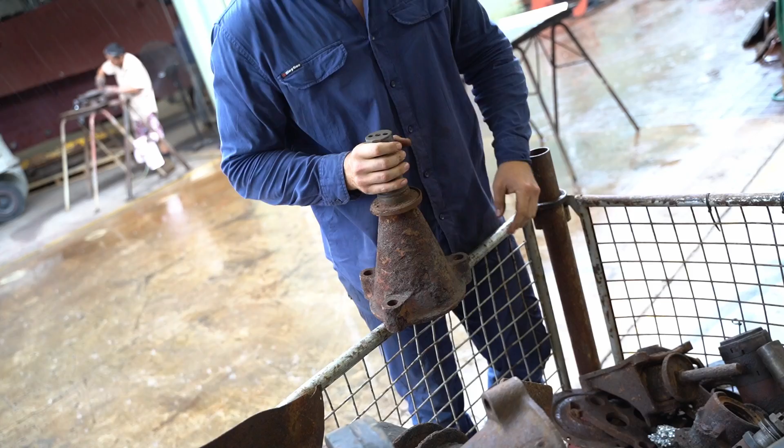The StuG pile in the museum is getting smaller and smaller. We've even brought out old part boxes from other StuG restorations in the hope that we might find parts we don't have. Even though this return roller looks usable, it's an early war one and not accurate for the variant of StuG we're rebuilding. These are the return roller wheels of the StuG III.

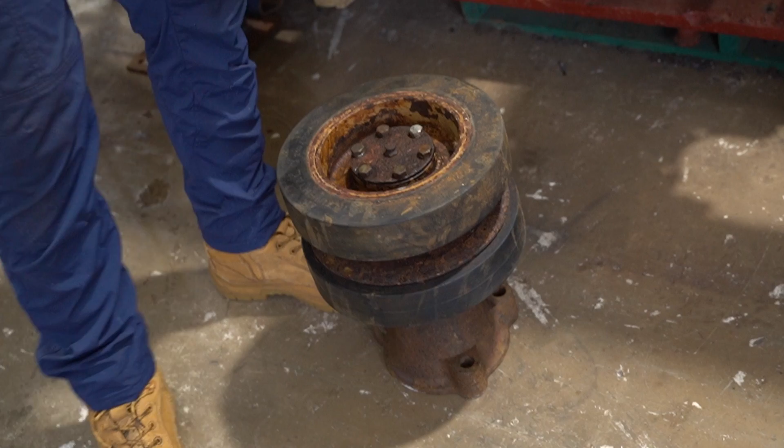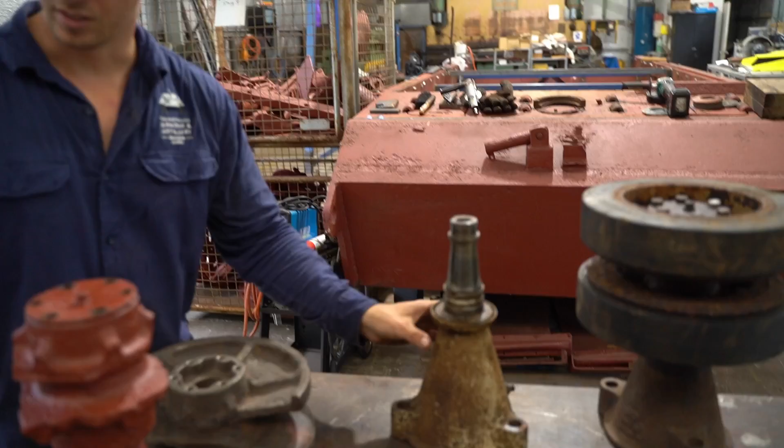We've got a few different types here. We've got one with rubber wheels, and we've got this one with the solid wheels, and a few differences in them. This is the early one here. Okay. You can pretty much tell straight away because of the design of it. Everything looks a lot more complicated than would have been late war. Yep. So this is a late one.

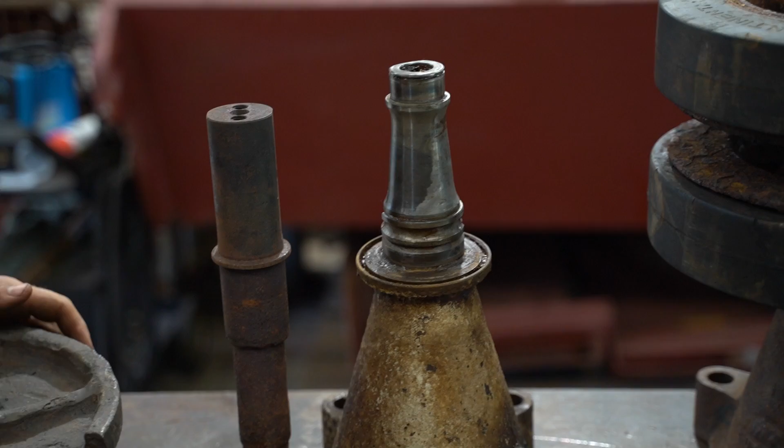As you can see, there's no taper or anything on the shaft. It's just straight. Does the exact same thing. It's a lot simpler to manufacture, a lot easier to make. This is the late one. This is actually what came off this tank. So this would have been 1945 made.

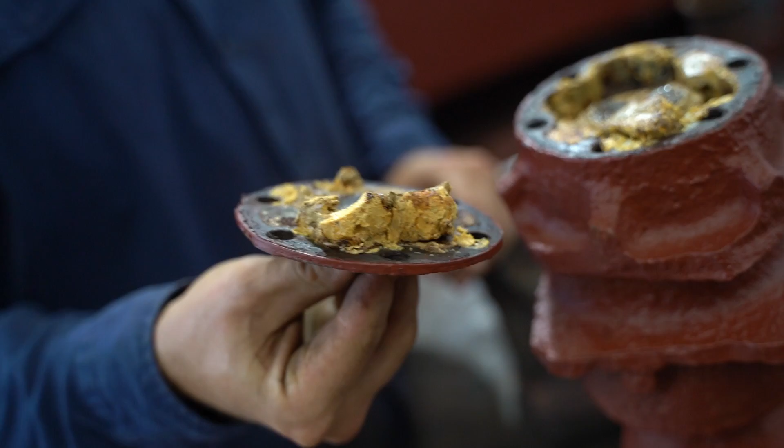So this wheel, everywhere I can see, it says that this wheel is supposed to be made by a different factory. I think it's called MIAG, not sure how to pronounce it exactly, and Alkett. This is what was on our tank when we received it. And we know that our hull is actually Alkett made, because Alkett would have been similar design, but with holes in them. 5 or 6 holes, I think it had. And yeah, these are the solid type.

So to sum up, our StuG is an Alkett factory StuG, but came out of the factory with MIAG return rollers. And it gets even more curious, as Beau made an interesting discovery. That's old grease, so the oil separated from it and that's what's left over. So that's what this piece here is, right? You can see your two threaded parts on the outside there. That's what these are, so they're bolts. And they hold the cap on. That cap sits against the inner of the bearing, and that's what...

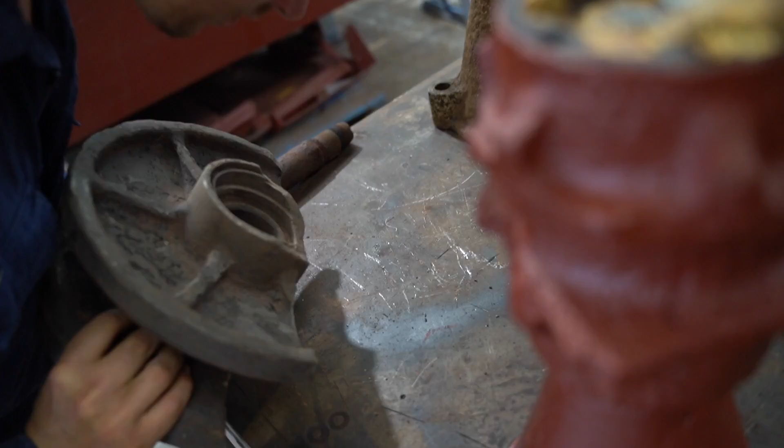No, I lied. There is no bearing. So the early ones had bearings, and the late ones didn't. So that would have just ran on that shaft purely. So the wheels, it's metal on metal. There's no spinning, moving bearing or anything. It's a late war thing.

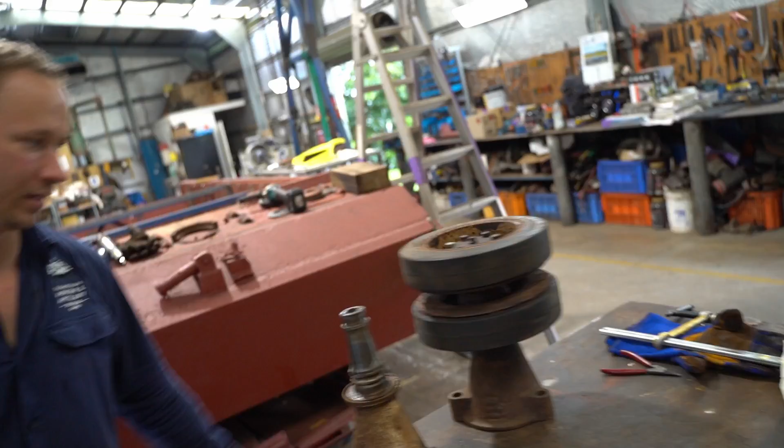So ball bearing factories and that were bombed and didn't have access to a lot of stuff. So they probably just thought, well, this is good enough for how long the vehicle's going to last. We don't really need bearings. And look how good it spins just for metal on metal. You know what I mean? Like there is no bearing in that at all. Whereas this one, it's got a bearing in it. It's got 2 bearings in it. Inner and outer.

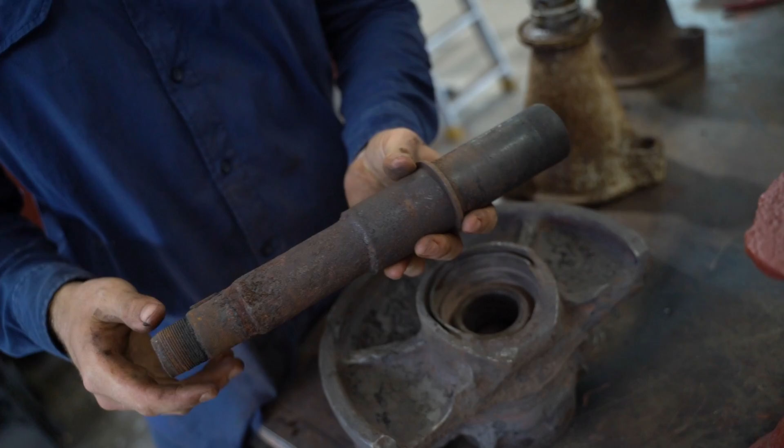We've got this wheel and another one that's a little bit more complete, and that inner. I think we've got enough of these. We've got enough shafts that we can use, but we don't have enough wheels. So we've got to make them. Should be right. Make them. It'll be easy.

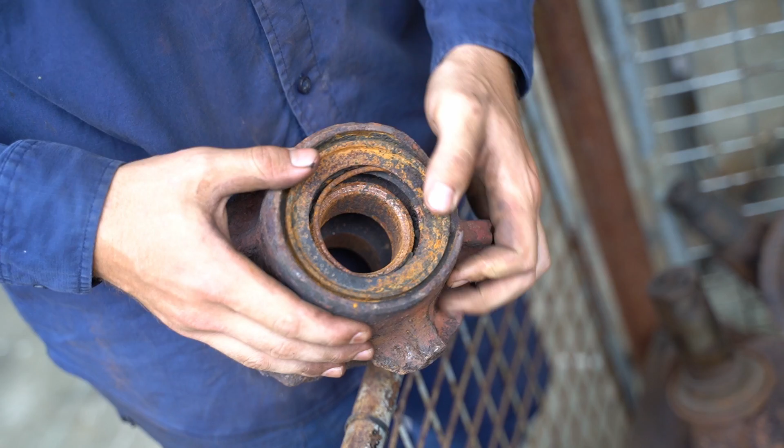This is a return roller. Pretty bad condition. It's a wheel. Well, what used to be a wheel. We've got to take all of this off and then recreate it by using the center and keep the center.

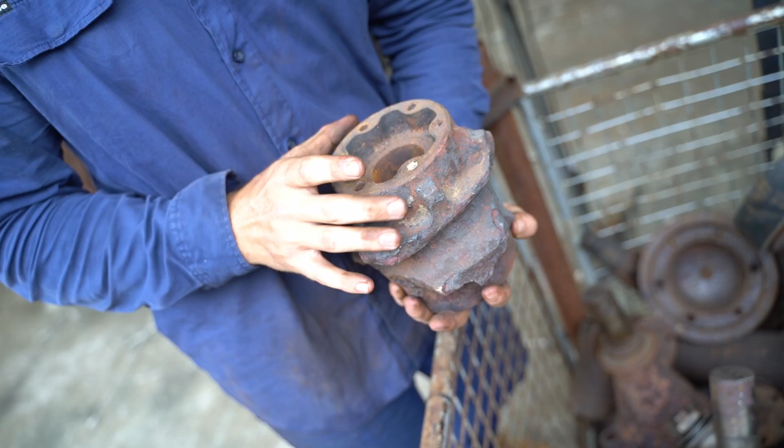So we have 2 damaged wheels that we will try and repair, 2 inners that we can use, and 6 original shafts. There are some other pieces like caps, bolts and nuts which we can also use. Little cone. The lead time on our steel supply is several weeks at the moment, so Beau loses no time in measuring up what he needs. Then he has to draw it up in CAD and put the order in as soon as possible.

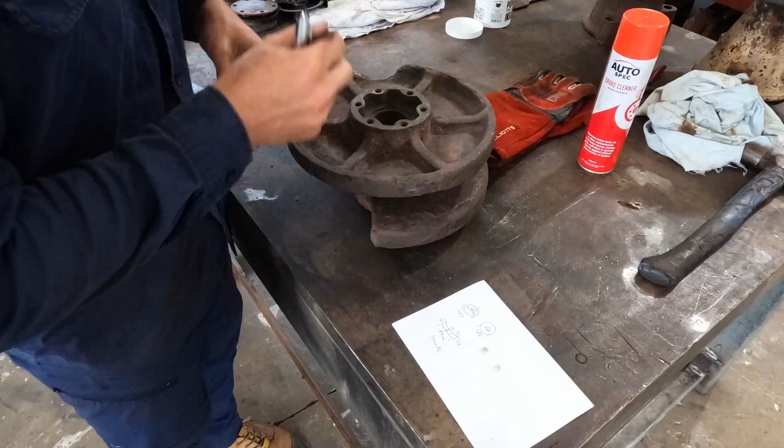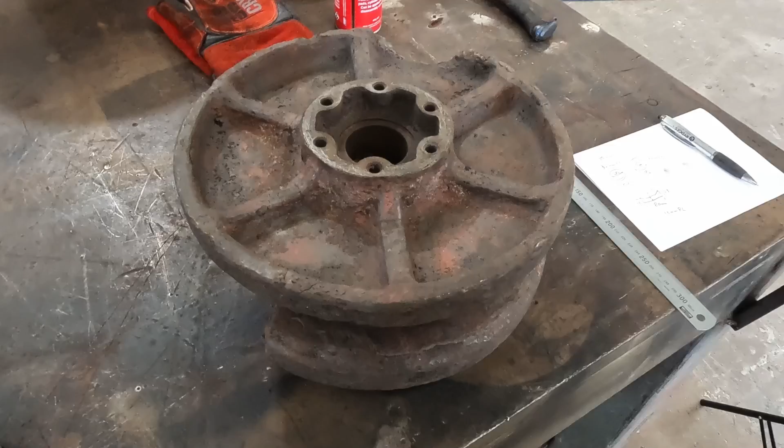We were pretty optimistic at first, but as always, nothing ever quite goes to plan. So we actually needed quite a lot more parts than I first thought. Quite a lot more. What did you initially think?

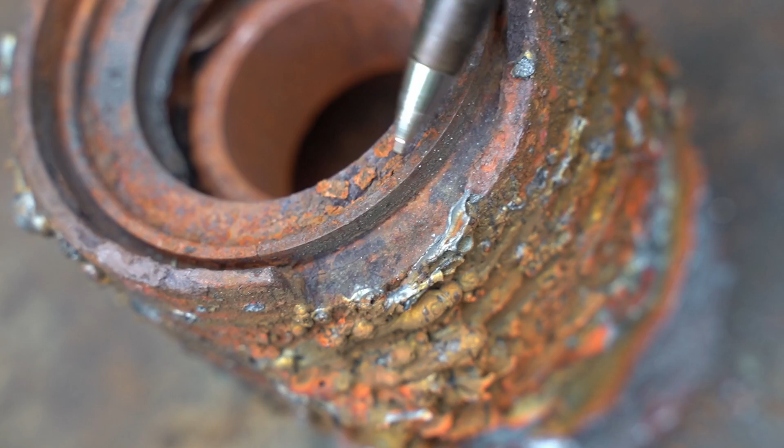Well, we thought we had more wheels to begin with, and we were going to use the more original parts, but the castings are actually cracking, so we can't use them, so we've got to fabricate more pieces. So we pretty much have one good wheel that we can use. One good wheel? One good return roller, yeah. So we've got to make another 5 of them.

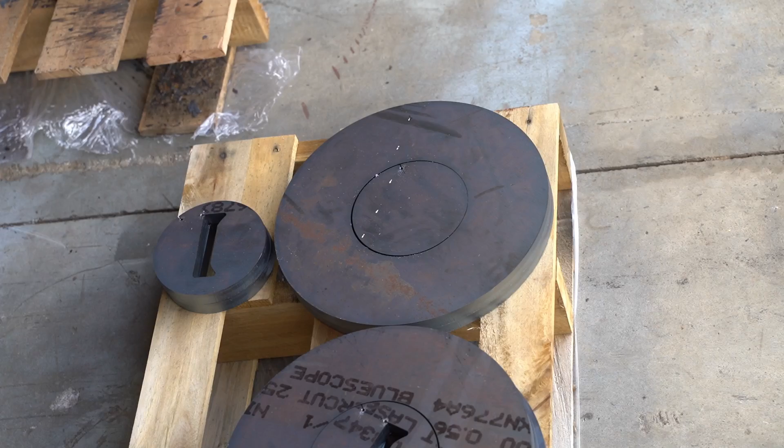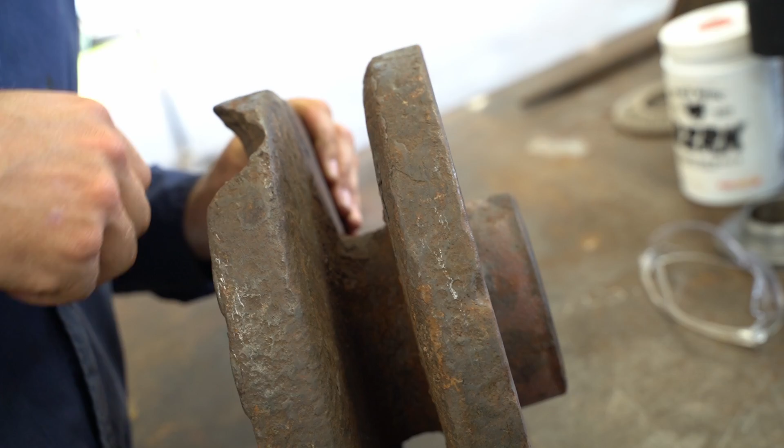The steel has arrived, but there's still a lot of work to do. Before we do anything else, we can't go welding anything on yet until we actually press this piece, the center, in, because they're tapered, they're not straight, and that's, I guess, for the guide horn on the track to go through. After we press that, we can then apply the outer ring and then start putting all the gussets on.

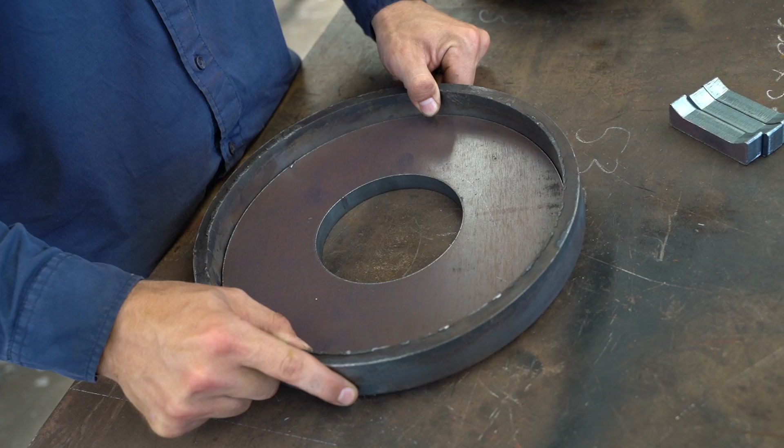It's got to be lifted slightly with packers around the outside to meet up with the height of the top of these spokes here. So that'll have to be lifted like that. Put this piece inside that. One of these from either way, just like this one.

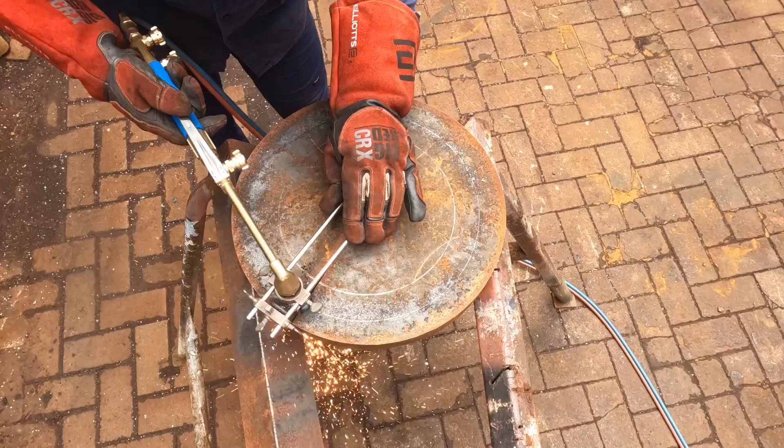But first, he has to press the wheels so they have a taper. To do this, Bo makes a die that the wheel can sit on as the centre is pressed. We have a lot of little tools and things like this that the boys have made over the years. They always come in handy later.

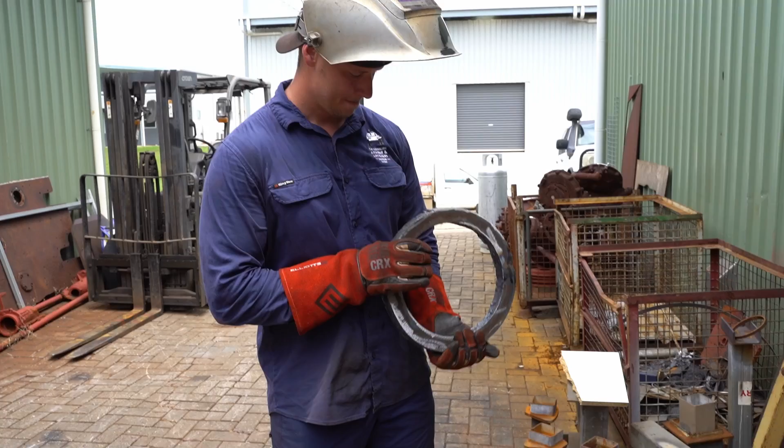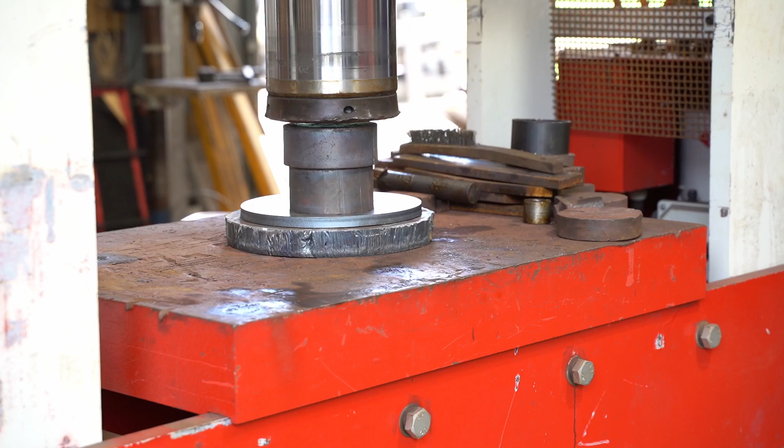It doesn't have to be pretty. It's not pretty at all, but it'll do the job. Oh, we got too far. Pretty cool.

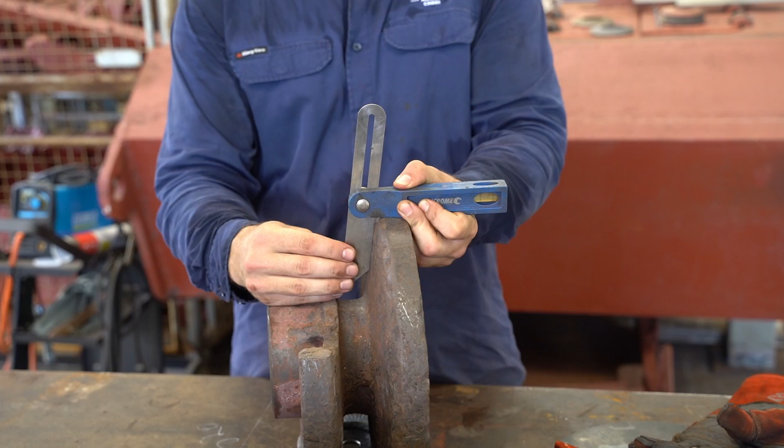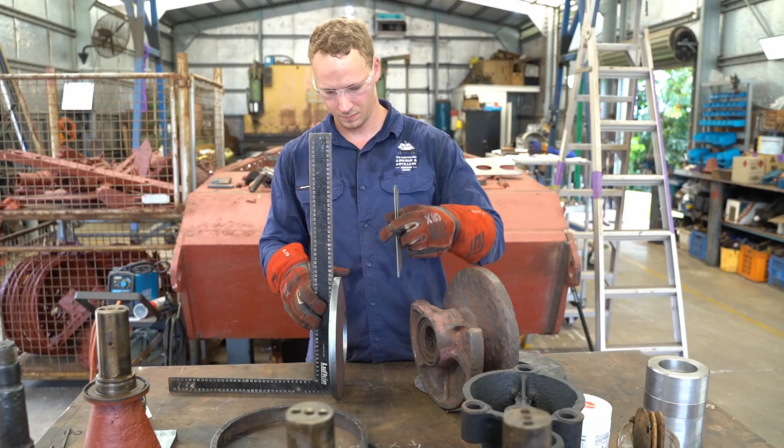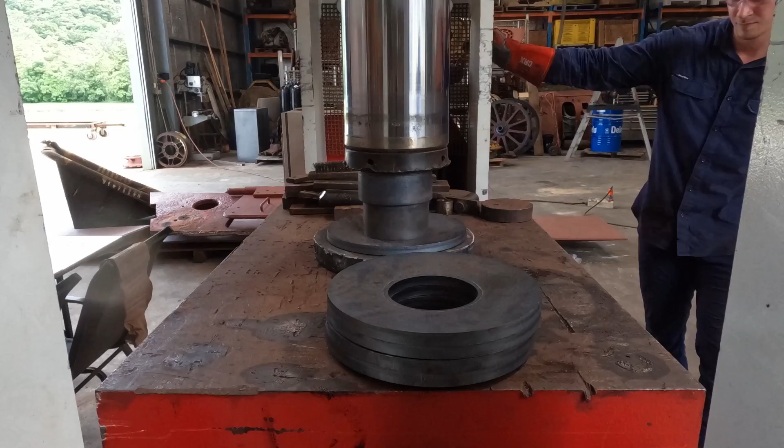So what I've got to do is square this face here up and then put the bevel square on. So I've got to take this back over. That's spot on. Exactly right. I was really lucky. It's great having a win like that. And you'd be forgiven for thinking that it was a fluke. Bo actually managed to press each one perfectly. First time.

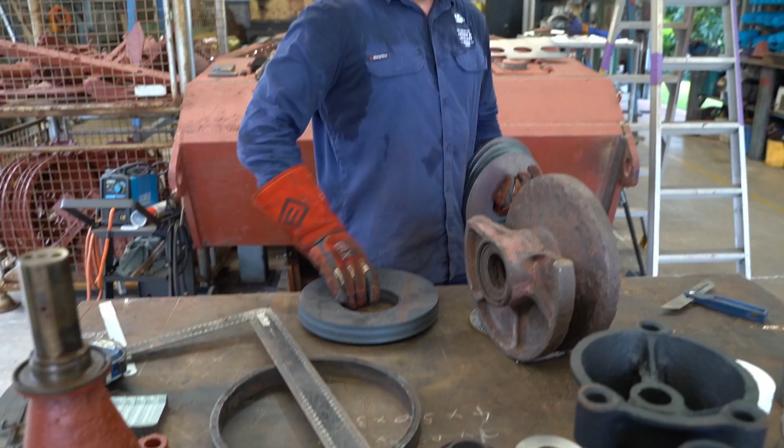Since Bo pressed these wheels, it's changed the diameter of the centre hole. This has to be cut out to the right size again with the lathe. For an expert like Glenn, it takes no time.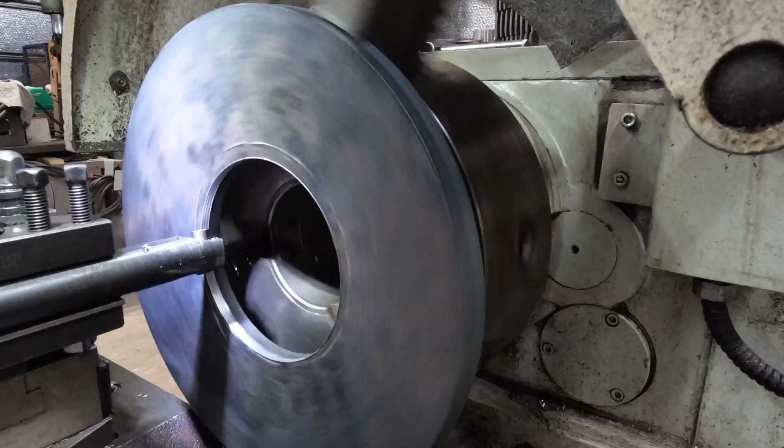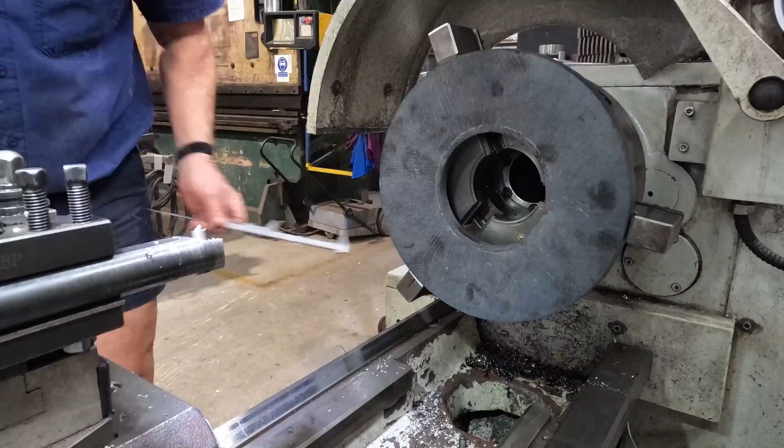These 32mm rims were oxy-cut by our supplier, and there was quite a bit of slag left on them. It's very important to remove the slag before welding or painting. Bo cleans off the rims as his dad works away on the lathe.

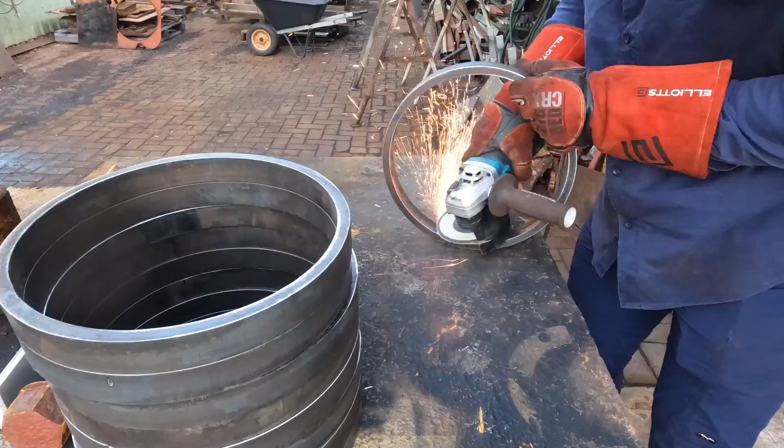The next job is to weld in the little bars onto the wheel. These are called gussets, and they greatly increase the wheel's strength. Bo is a stickler for detail. Even though most people won't notice if a return roller gusset is 2 or 3mm out, Bo will know, and it will haunt his dreams for the rest of his life, unless it's perfect.

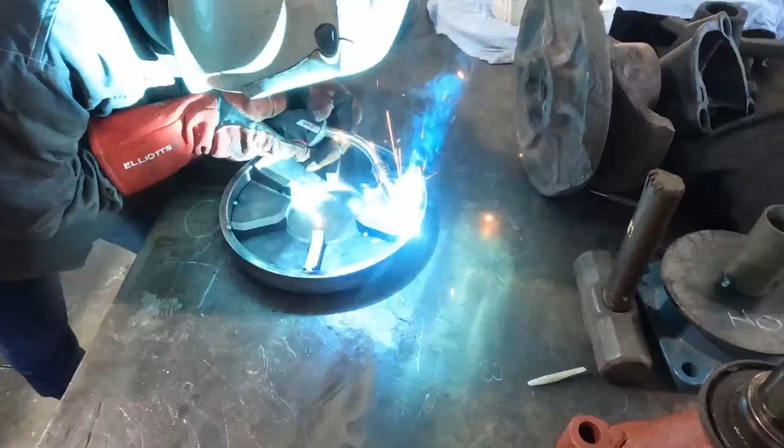Going into this much detail to make the wheels look like cast pieces takes a lot of time and patience, but in the end, it'll all be worth it. Glenn is now going to smooth out the weld, which will make it look like one solid piece.

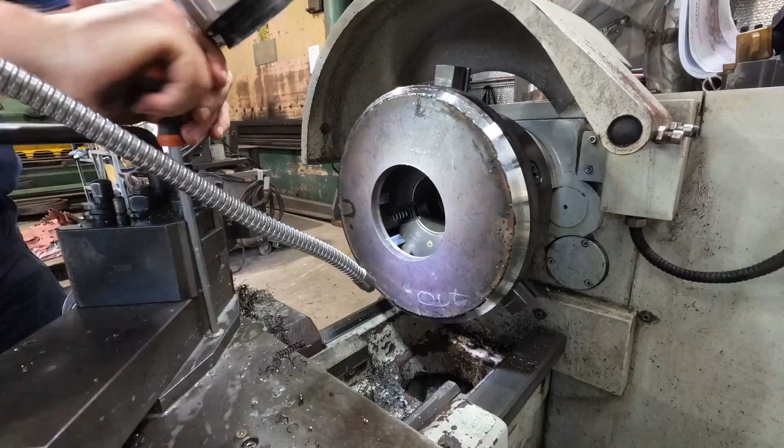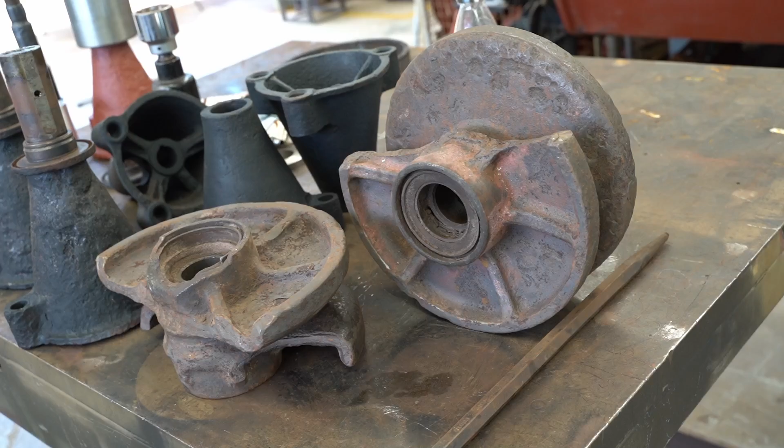The original wheels are not in good condition at all, and we nearly decided against using them, but it seemed too much of a waste not to try. If these were road wheels, it would not be safe for us to use these pieces. But since we're only going to be driving the StuG around once a year or so, they'll probably be alright.

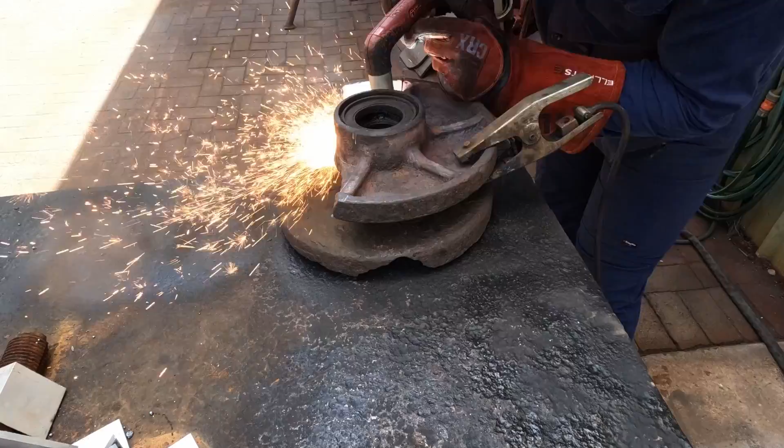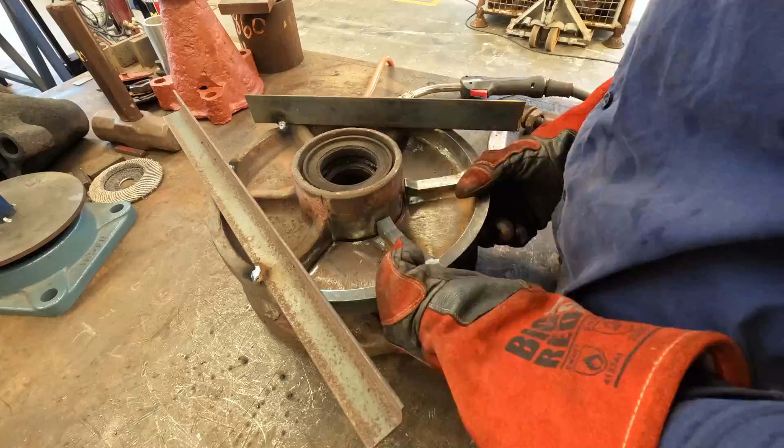Bo removes the broken edges from the wheel and cuts up one of his new wheels to fit. Then he tacks on some bar to use as a level, and then tacks the new part of the wheel on. Most steel on German tanks is hardened, so in order to join the mild steel to it properly, Bo uses the stick welder as the electrodes have more flex.

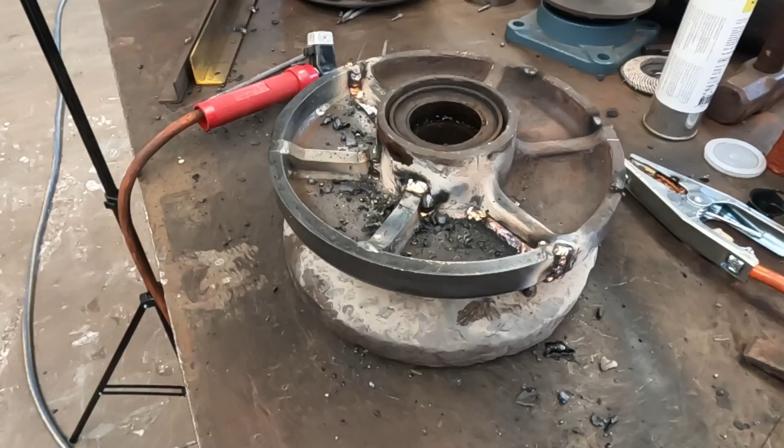This is the hub of the return roller. So Dad's made these. And you turn them out as like round bar? Solid bar, yeah. Solid bar. What he's done here is copied the dimensions exactly of an original hub that we had. So that's how we know what size to make everything.

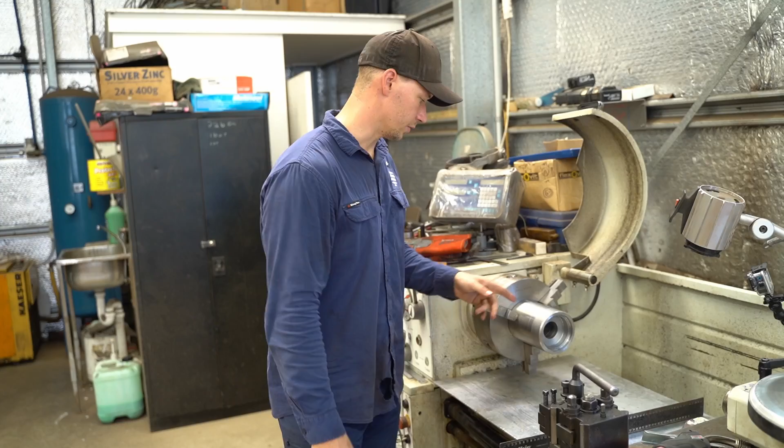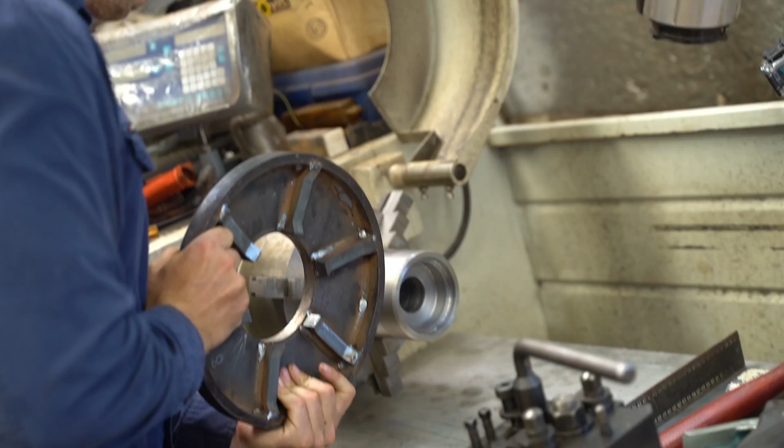Yeah. Slip this wheel over in the lathe. So we're going to tack it on and then spin it, see if the wheel spins true. And if it's out a bit, then we'll just keep tapping it until we get it in the right spot. We've got a reference line here that he's turned into it. So we just push the edge of that up to that line and it should be right. We'll give it a go. Right through until there.

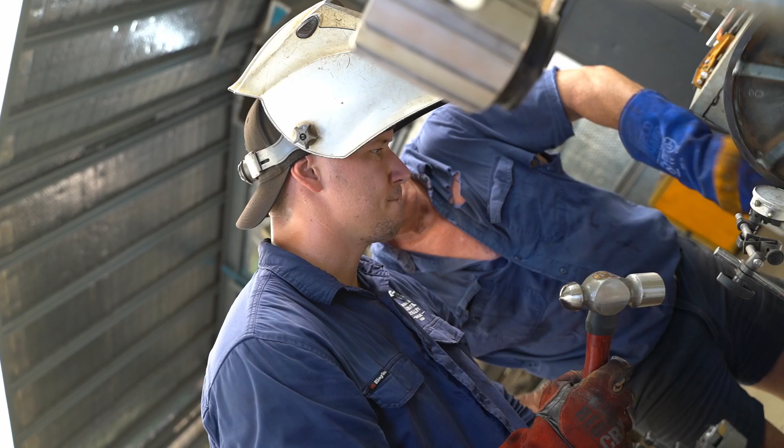Right, so what he's doing now is he's putting an indicator line 40mm in from the end, so we know exactly where to put the next wheel in.

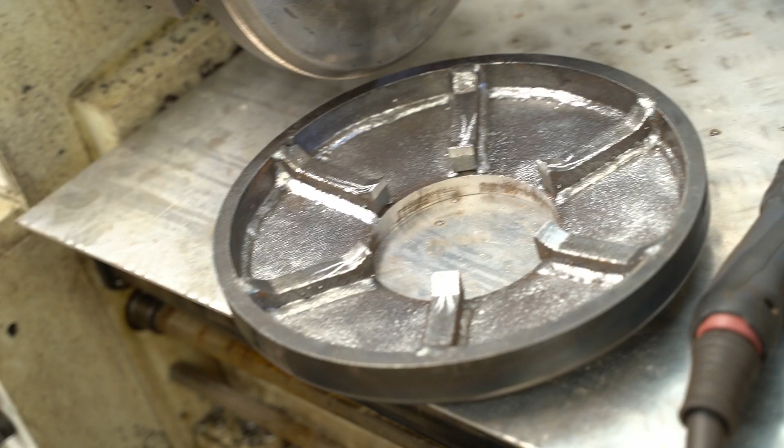We got the needle gun and we've weathered the plate a little bit, just so it doesn't stand out so much, I guess, on the tank. It's brand new fabricated steel when it's supposed to be a cast part, and the rest of the tank's all pitted badly. So we put a bit of texture on this here, just on that face, just to give it a bit of something so it doesn't stand out. I know you scale modelers out there would appreciate this sort of weathering technique.

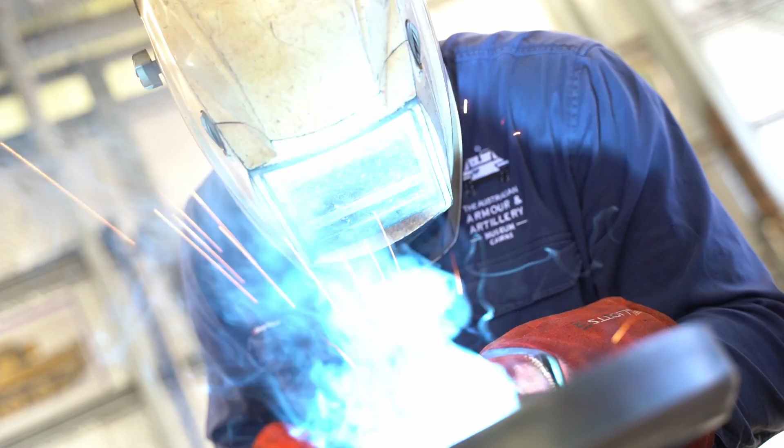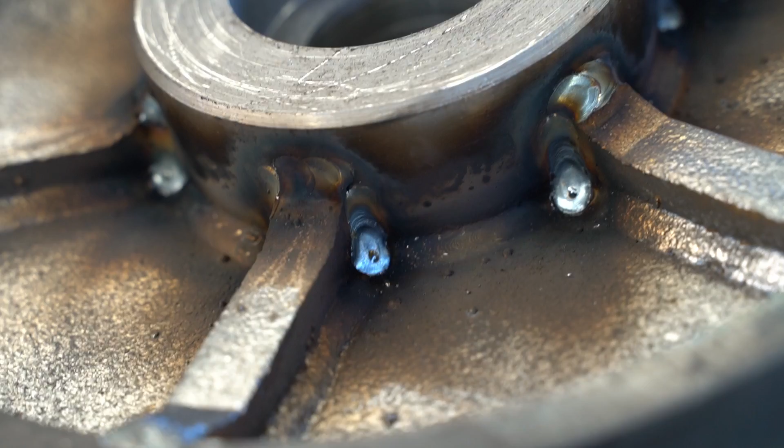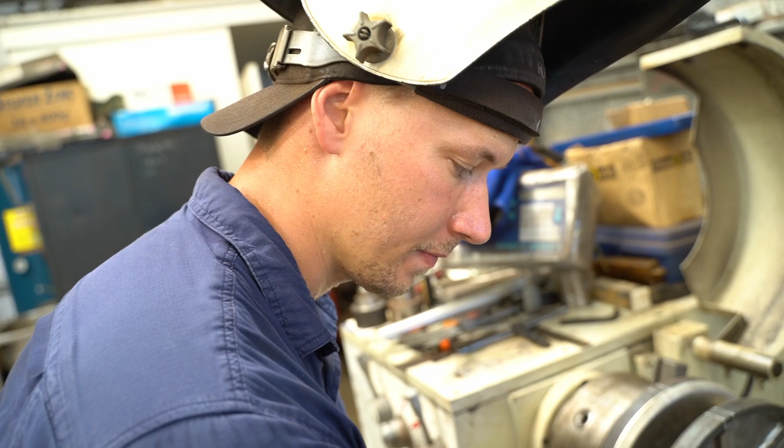Now it's time to give the sharp edges a smooth bevel and machine the face of the rim nice and flush. To help us out with this job, we use a dial indicator. It just has like a really sensitive pin on the end of it, and as soon as something is out of round, the high spot will then touch the end of that pin, push it in, and that will indicate how many thou or how many mil it is out, like how far it pushes that pin in.

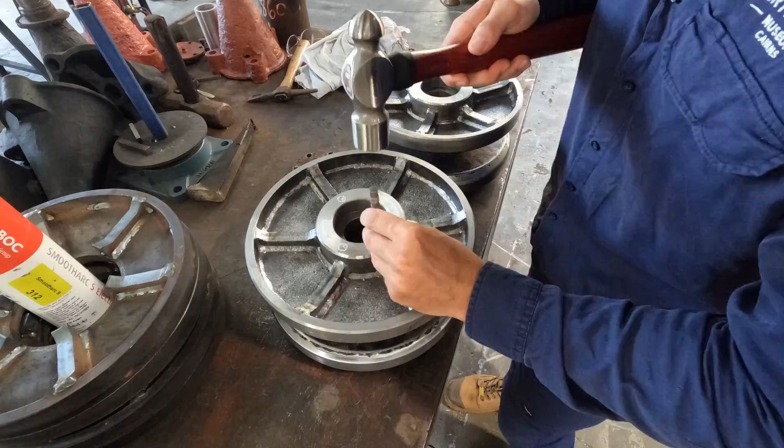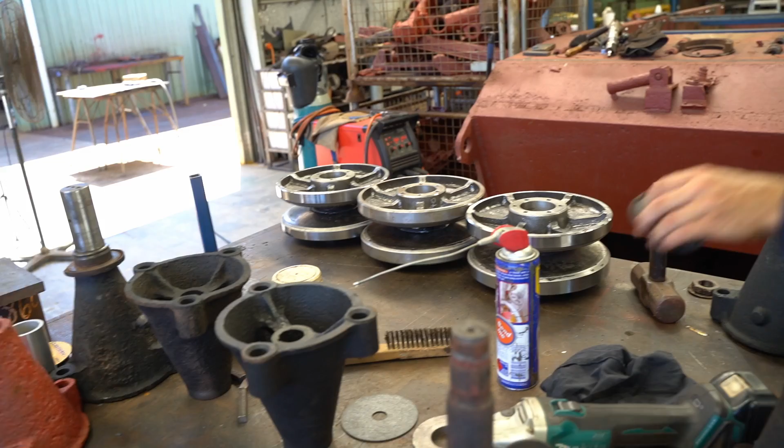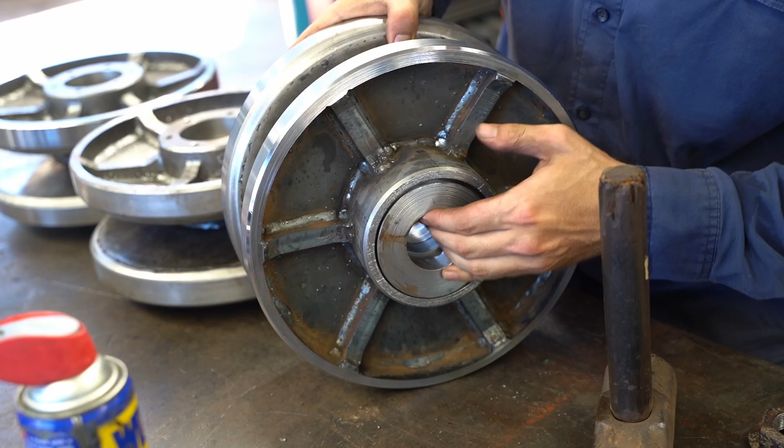Now we have 4 fabricated wheels and 2 restored wheels. The restored wheels have been sent away for sandblasting and priming, but we can prime and prep the fabricated ones here. This is a piece that sits in the back of the wheel. I'll show you quickly. This piece goes inside here, and it works along with the seal to seal the back of the idler wheel up.

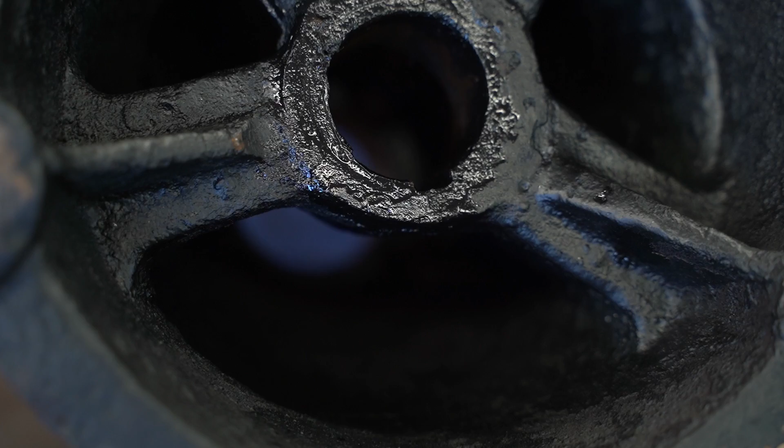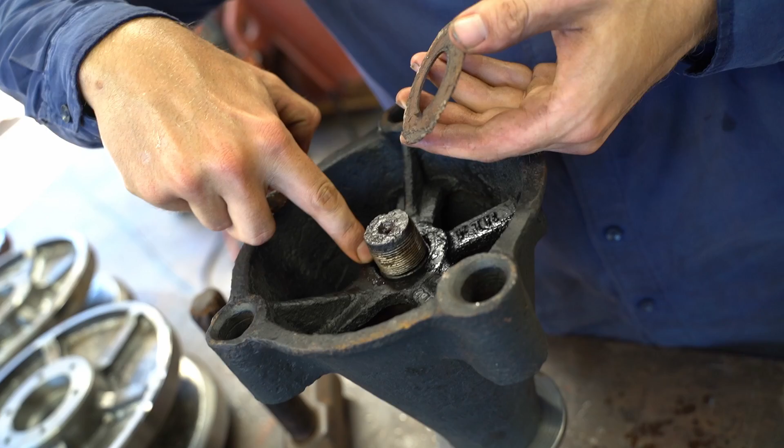So this piece slips onto here, and then the shaft goes through this way, and this has got a keyway on it. That's that. That would have been a little bit longer, and that would have slipped down in where the key also goes, but that's still plenty. And it goes into that groove and stops the washer from turning, and then they fold the washer up onto the side of the nut, stop the nut undoing. Not that it would ever undo anyway.

Alright. Oh, this is an original one. Yeah, this is an original shaft. Everything's original here except for this piece here. Original shaft, even the nut and washer are original. So I've got to clean this up. It's got a few high spots on it. I'll just take them off with the emery tape.

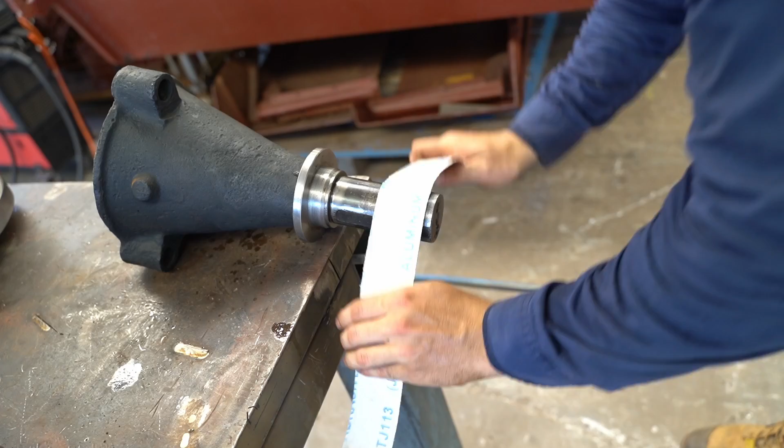I know where your mind is going, don't even think about it.

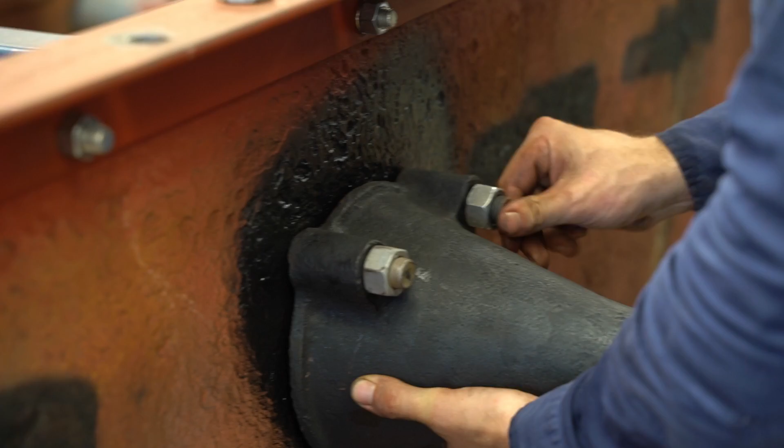So what we're going to do now, we're just going to test fit them on the hull, see how they all look, line them up, and then we can take them back off and paint them. Right, so we're just using threaded rod. What we've got at the moment is just temporary, just to trial fit everything. We're going to make proper bolts later on for these. This was the prototype with proper bolts and everything. It turned out great.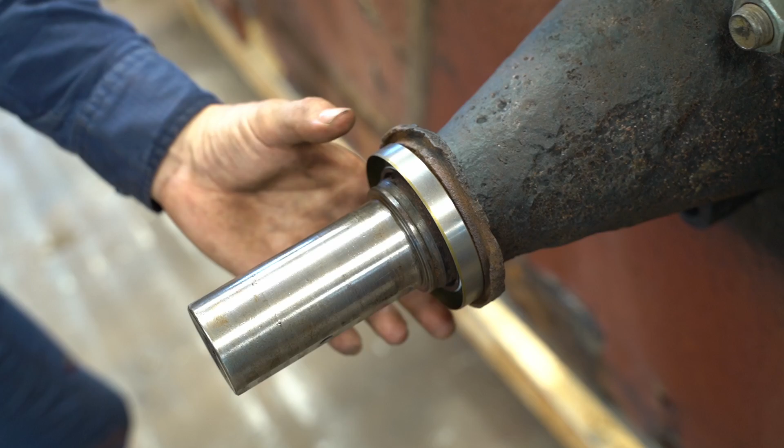The reason for this groove here is actually like sort of a dust trap. Stop dust getting into the seal. So this seal will go on here. There we go.

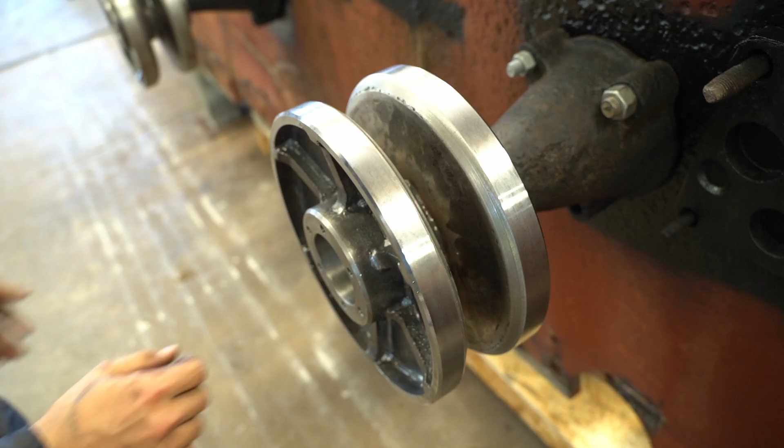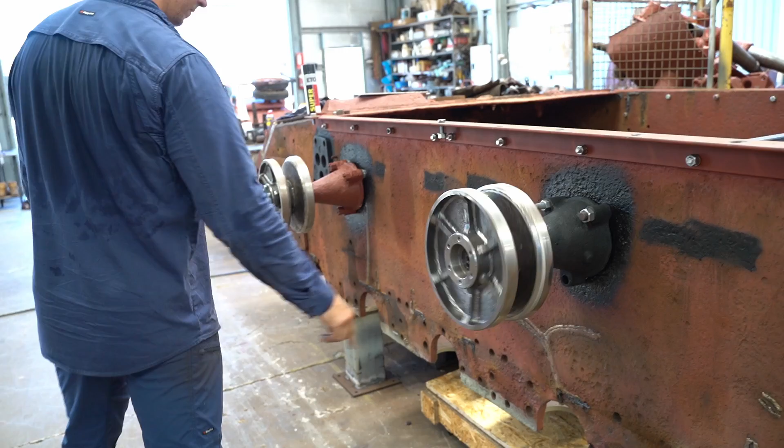They will fall off. So I might just put one of these on. It's just temporary to stop anyone pulling that off. That's how they actually were though. That's an original washer to stop the wheel coming off. So that's how the wheel is held in. You can see it's an original bolt. It's actually twisted.

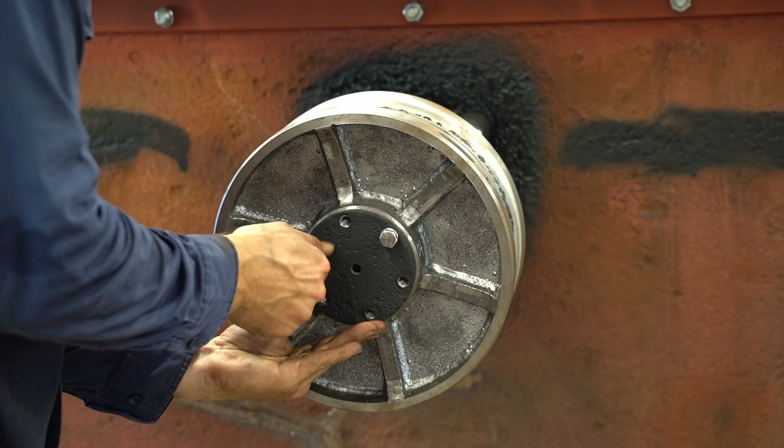The attention to detail is really astonishing, and we hope you enjoyed this small glimpse into the process. Don't forget to let us know if Alket and MIAG sharing parts was a common occurrence. It certainly struck us as strange.